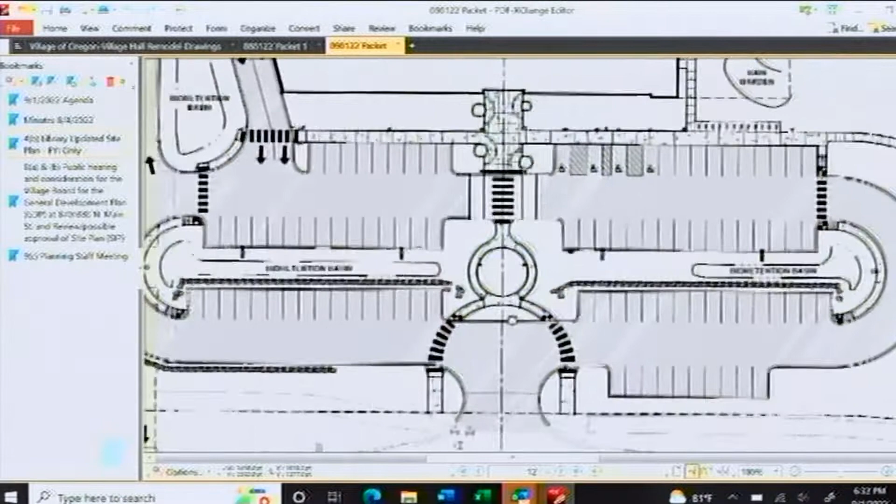Some of the things we talked about was widening that drive aisle for the book drop. We did that. Another one was the entrance, which had kind of an off-axis entrance walk path. So we trued that up so it was more circular in nature and matched the look of the rest of the plan, where it was pretty symmetrical. That was the one piece that wasn't symmetrical, so we corrected that.

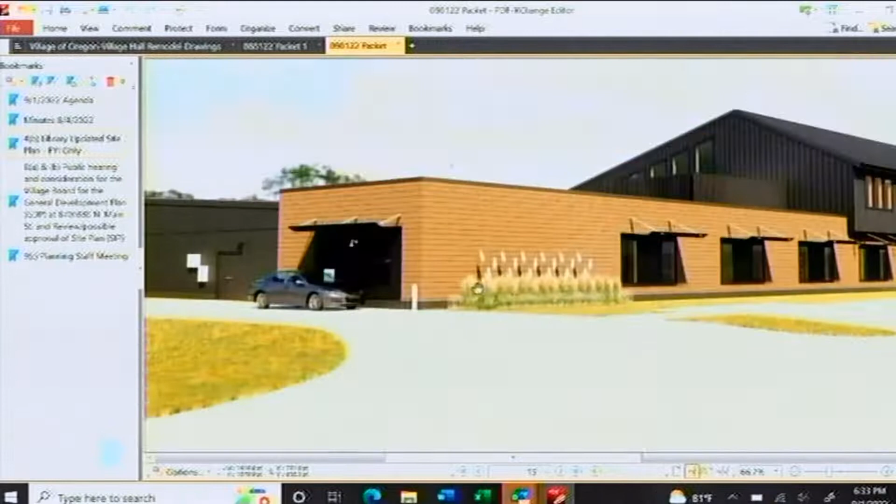Do you want to talk about the window canopies? Yep, so next we started looking at some of the architectural elements. There was the comment about bringing that front entrance canopy all the way across the front of the building, so we did that and broke it up over the window bays across the entire front of the building to help draw that line all the way across.

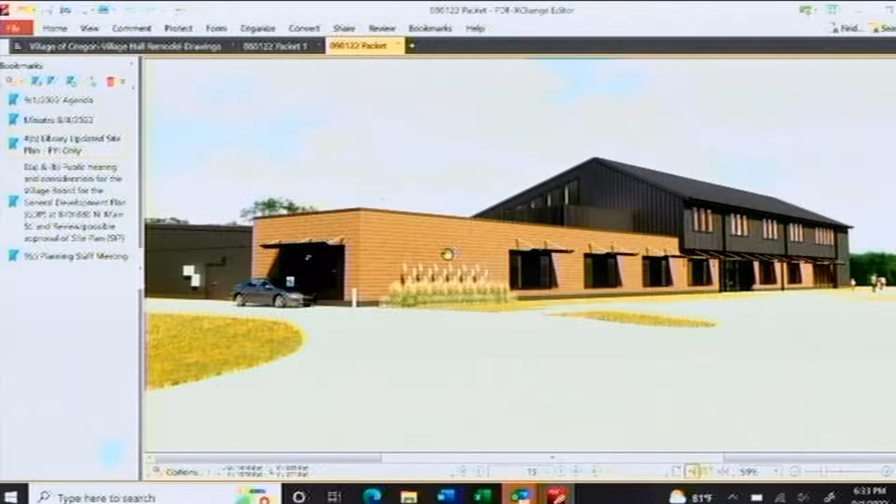As you go through the next couple slides, here is where you see it starts on the right. In the middle is the main entrance, and it works its way both directions over the different windows. Here's as you're coming around the south edge of the building, and the next rendering shows how that canopy looks at a closer view.

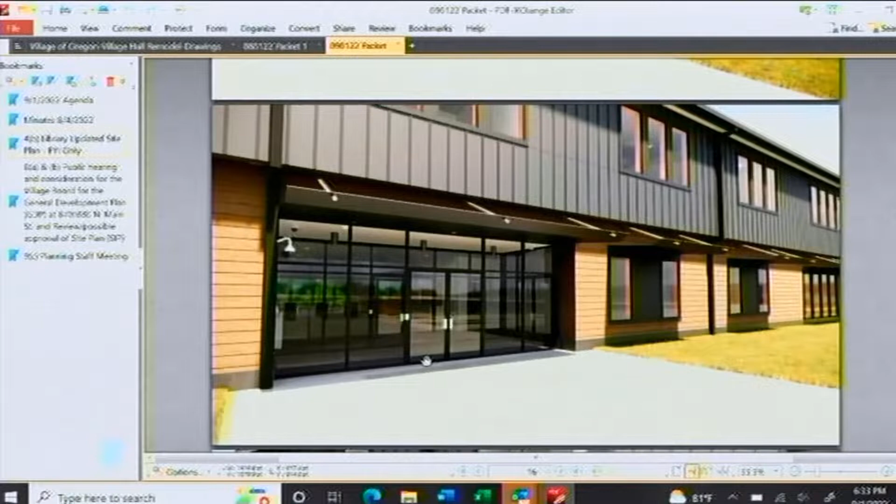It does kick moisture away from the building, and there's a little lip on the front to help catch it and disperse it off the canopy. The depth of those canopies will also help quite a bit with solar on that west side of the building. That's one reason we decided to keep them as deep as the main entrance. We looked at a reduced depth, but keeping it as deep as that main entranceway really helped with solar concerns on the west side.

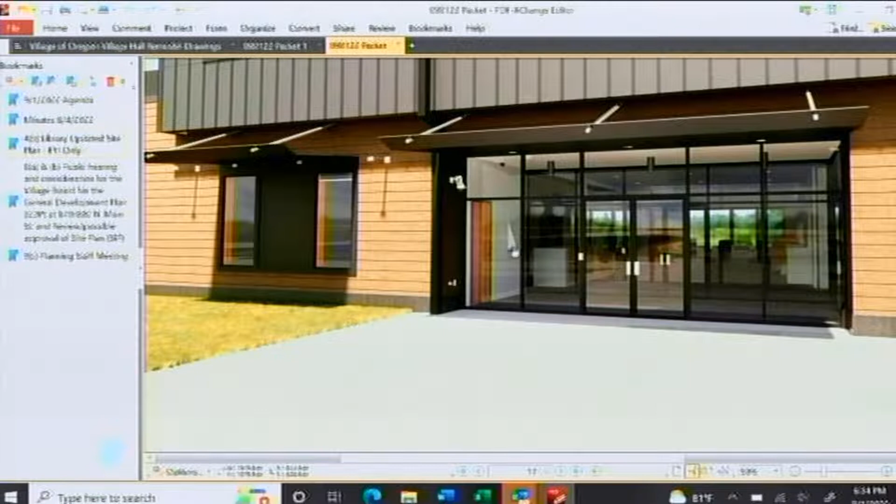There was also the comment about exploring masonry for the tan wood look material. We currently do have that in our documents as an add alternate for masonry. I've told Randy multiple times, you're not going to hear any fighting from me to get some masonry on the building. I think the building would want that. It really comes down to whether we can afford it or not. So we're exploring that, we would love to see that happen. We think it would be a great way to ground the building into the site.

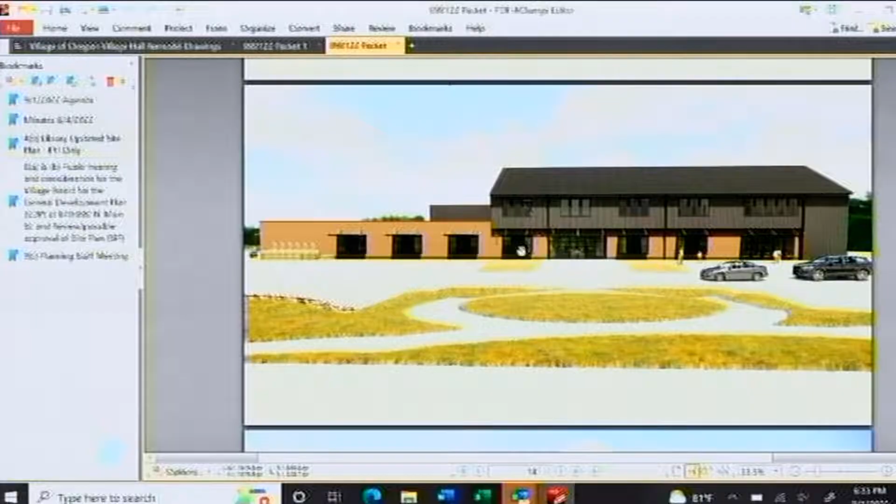I think there were just a couple other comments made, and I want to address that those were also incorporated. One suggestion from John Bano was to make sure we added dashed lines to the plan to show future building expansion locations. So the site plan in your packet today does reflect the locations where we are anticipating future expansion of the building would go. The future expansion of the parking lot was already dashed in prior to that comment, so that is showing on the left side of the plan.

There was also a suggestion about one of the tree species along Alpine Parkway, that it be substituted with a different species to make sure it didn't block sight lines. That comment was also taken and will be updated on the landscaping plan.

The final comment I recall was about the patio area off the second floor level, if we use that as a patio area, that there should be some shading over top of that. We decided that if that area is developed, it would just be a green roof alternate. So we are now focusing the patio seating to the back side of the building for a variety of reasons, and that would just be a green roof area if that alternate is selected.

Are there any comments on any of the responses we've made to your feedback or your contingencies? I should also address that fire department approval was made on the plan since our last meeting here.

Very good, thank you. Anybody have any comments? I think that you've done a wonderful job of responding to what we had said, and I appreciate that. Anybody else? I'll just say the canopies are good, I think that was a nice addition.

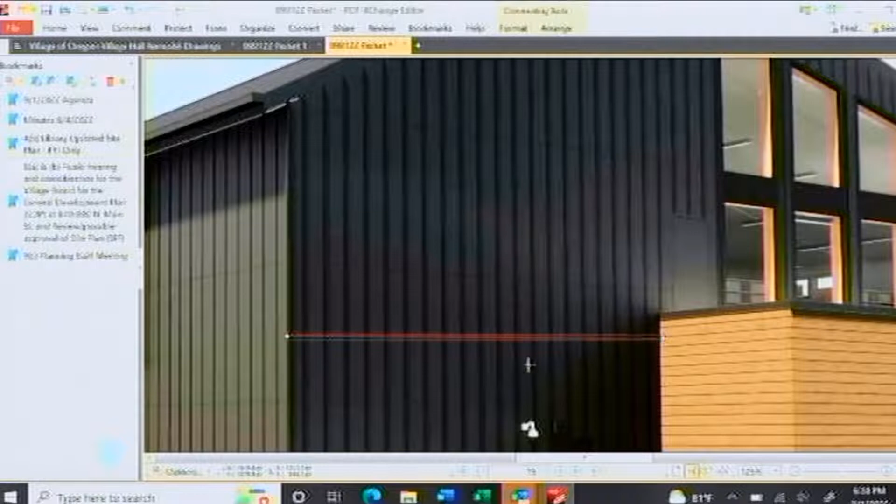The other way of doing that is running a bold trim piece that you flash over, but really what we were trying to do is keep that verticality with that pattern, and once you introduce that other band, it really started to break the building up in a way we weren't going for. No, the long vertical lines are fine, it was just right. Limitations of the materials, expansion and contraction and things like that. Yep, exactly.

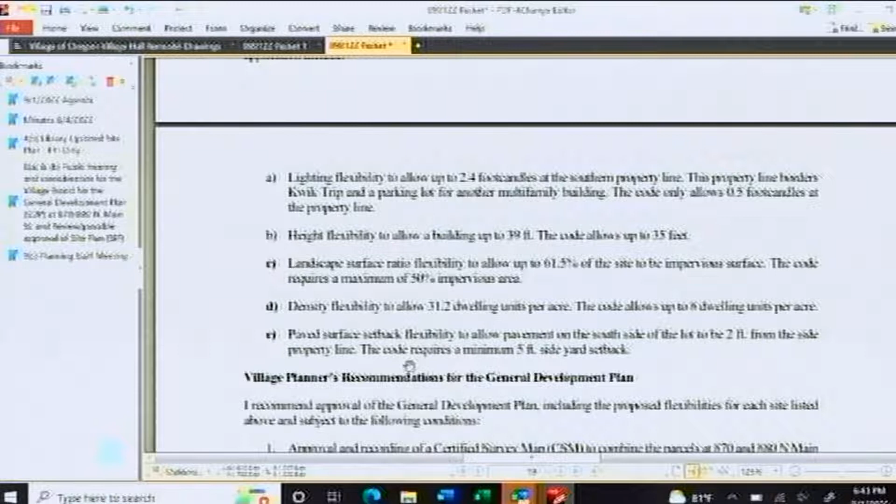So the GDP approval, and obviously construction and all those other things, will kind of hang in limbo if it's approved until the CSM also gets approved and recorded to combine those 2 parcels. Wrapping up some of the village engineer comments - and Adam, maybe you know this off the top of your head, but the number of underground parking spaces wasn't listed on the plan, so just wanted to clarify.

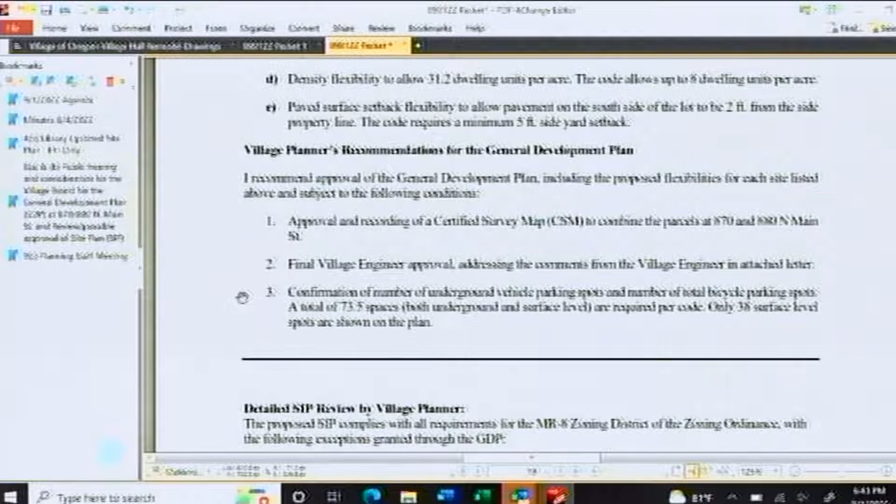Yeah, we had a number earlier that I've got to dig up. I'm going to refine it a little bit by changing the mechanical areas. The trash area's got to get a little bit bigger. There's some bike storage, and then we're going to add some storage units down there. But I can pretty well control that number based on how many storage units we add.

Yeah, so it was high enough - actually higher than people wanted at the village council or village board level, exceeding the requirement here. We require about 74 spaces total between the 2 levels, so that'd be something I'd check up on later.

So we can get into this a bit more with the SIP, but I think for the most part, the engineer's comments were - there were a lot of questions about stormwater management. I talked today, and I think the plan from Quam was that the stormwater management plan would be submitted with the other final plans and building permits.

They also had a question about that south property line. Maybe Jeff, if you could just go to the site plan - so that parking lot there, maybe page 24 of the packet there.

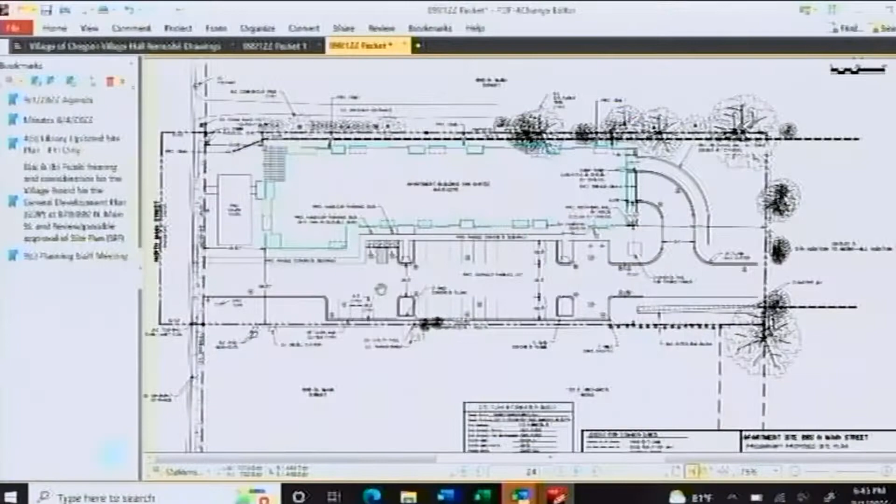Let's not confuse this. The thing on the agenda right now is the GDP. Do we want to do the SIP stuff later, so we're not confusing things? One thing that ties in is the paved surface setback, just making sure we don't have cars parking all the way up on the curb in those southern parking spaces, making sure there's a curb stop so the front end of vehicles isn't interfering with the landscaping or bleeding over across the property lines. That was an outstanding comment, but let's tackle the GDP items first, then get into the site plan.

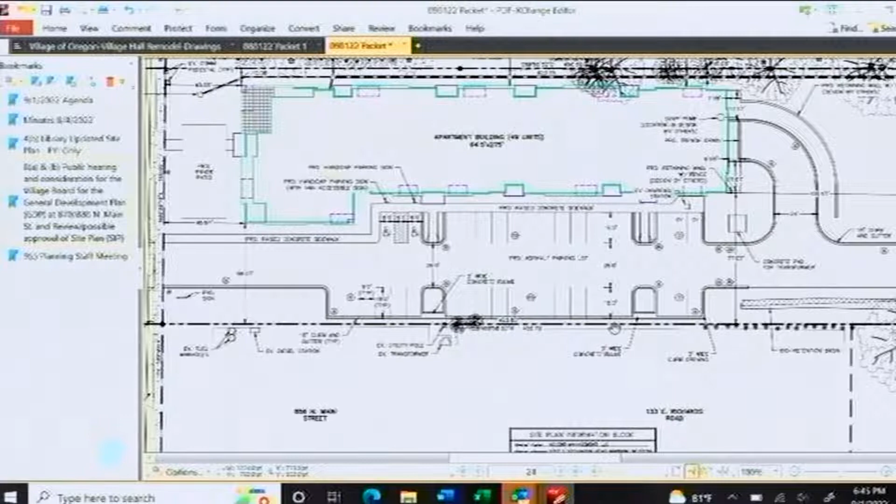Adam, do you have anything to add? We'll move on to petitioner comments. No, I don't think so. If anybody has concerns or comments, I'd respond to that. On the lighting, I think I can have them tighten that up a little bit.

I would hope so, if they can. Honestly, the difference between 2.4-foot candle and 0.5-foot candle, I don't know how much you'd discern that on a regular basis. It looks like it goes in at that level for less than 10 feet or so. Right, usually the bleed off on that, since you're using LED fixtures, it starts to really cut off.

I'm trying to figure out what page that was on. I will say we have not heard anything from any neighbors, everybody got a letter for the public hearings. I did speak to the owner of the apartment complex today, who had a few questions about the storm sewer or stormwater. I'm not sure they caught on to the lighting thing, but it looks like it's down to half-foot candle or 1-foot candle. What page is that? Page 39 of the packet. I think it goes down pretty quick there.

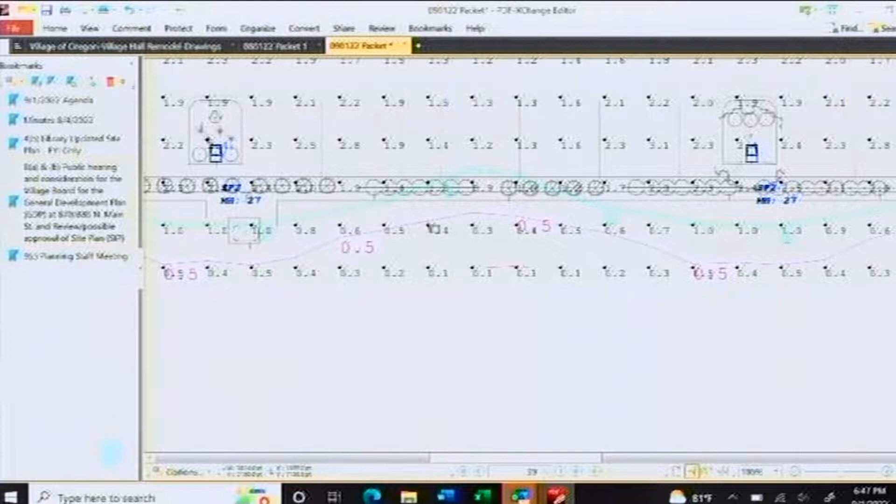Maybe 5-10 feet into the parking lot. Let's pick a spot here - this is less than 1 through most of this, about 10 feet. It's probably just because there's a parking lot pole right there at that little landscaped island. I don't see that probably affecting the apartments next door. If anything, it's gonna be nice, because that's probably a dark corner back there in the parking lot.

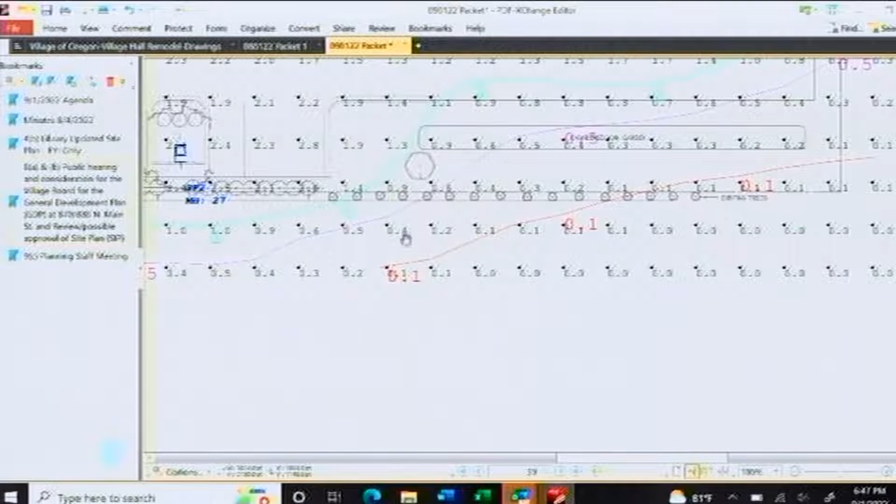The majority of this is 0.1. The only time you start to deviate is when you get right around the base of this - right around here it goes from that pole, and the maximum there is 1.0.

Anybody from the public like to make any comments? Seeing none, we will open this up to the plan commission. Anybody have anything - we've seen this before, it's just the details of it. Anybody have any questions or comments? I have a couple questions, but I think they're more SIP related. I don't know if you want me to ask them now or wait. Go ahead and ask.

My first question is about trash collection. Can you walk me through what would be the process to collect the trash? Which way is the vehicle going to come in, turn, and what are they going to do? Let me remember that - the trash will be in a trash room in the basement, so that's enclosed.

It's got to be the same way they serve, we went through this when we did the Jefferson Crossing. They're located at the bottom of the drive, at the garage entrance. The truck pulls down, they pull them out, dump them, wheel them back in, and then the truck backs up, just like at Jefferson Crossing, into that kind of hammerhead. That's what I assumed, but I wanted to check that it's been thought out. So where are you going to put snow?

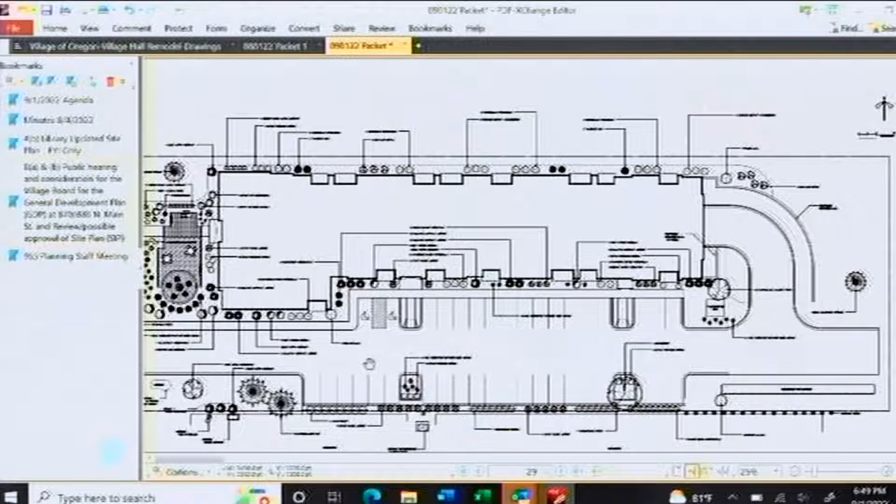It's probably a little tight, but right where Jeff's moving the hand is one spot. We'll have a little bit of space in the front part of the parking lot. I don't think I'm supposed to put it in the basin itself, but I think there's a couple conifers in the southwest portion, just off the parking spots there. There'll be a little bit of space there.

I do believe that we can probably, in the winter, if we have to, sacrifice a couple of parking spots. Okay, my concern is that hammerhead would fill up with snow, and then all of a sudden, what is this big trash vehicle gonna do for turnaround. So I just wanna make sure that that is thought out.

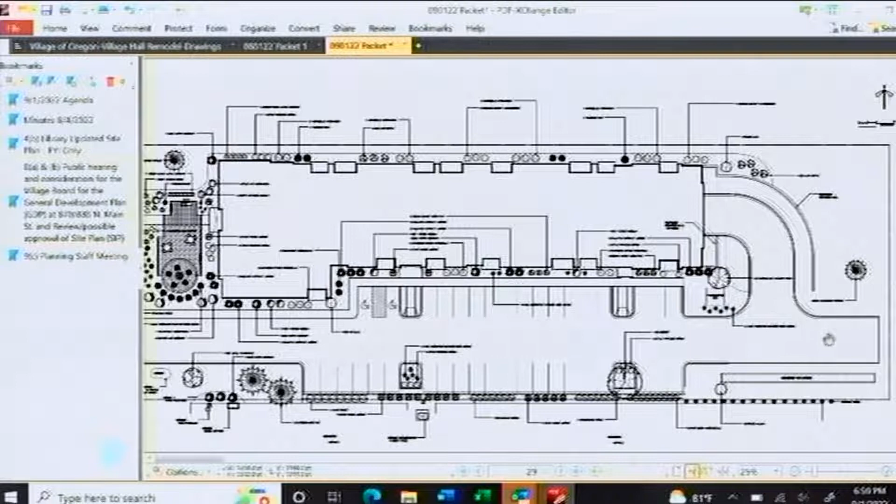And then looking at the elevations, your drainage looks like it's going to the east. You've got, it looks like, storm sewer, just making sure that the amount of flow that's happening, that's going to the apartments is not gonna be an issue, long-term. To the existing apartments? Correct.

Yeah, that was a question I fielded today from the owner of that, and if you can see, here are the apartments right here. This is collected here and is piped out to an existing regional detention pond out there. So they treat it, and then that treated stormwater goes into here. So I confirmed with him that really no stormwater is gonna go from this site onto his property.

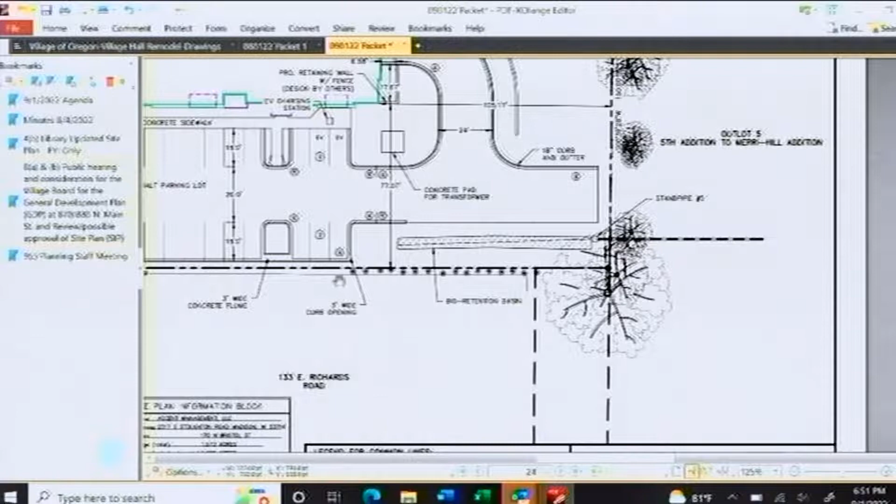Okay, yeah, I just concerned if we have a high storm event that we don't have issues. Yes, that's always a concern. Right now, there's no protection whatsoever, so I'm sure it probably occurs right now in a heavy event.

We did consider the runoff from the sites to the north, and then on that basin, in talking to the engineer today, we're planning on adding an overspill, so there'd be a spot in the, I guess it'd be the southeast corner there, which sends it towards that right of way. And that's where they thought that would be the best spot to make sure that in the event that does overflow, it doesn't send it to the apartments. There's a guided place that is not going directly towards the existing apartments.

Okay. Anybody else? I've just got two suggestions.

One of the things that you can do with the lights to help mitigate that is to take those poles and instead of having them at the nose of the parking stall, move them up towards the drive aisle itself. It's not much, but any distance you can put them closer to the drive aisle pulls them further off of the neighbor's property, which again, I don't think is gonna be an issue at this location, but it does help and minimizes any overlap.

The second thing is, and I don't know what the village's appetite is for this, but in the past, where you have this worry about parking stalls close to a property line and overhanging and that kind of thing, go to a 16-foot stall and allow for the green space of that 2 feet that you're shortening up the stall to be maintained there.